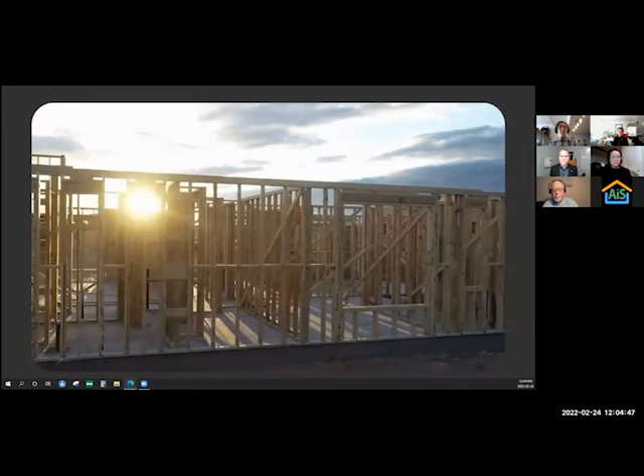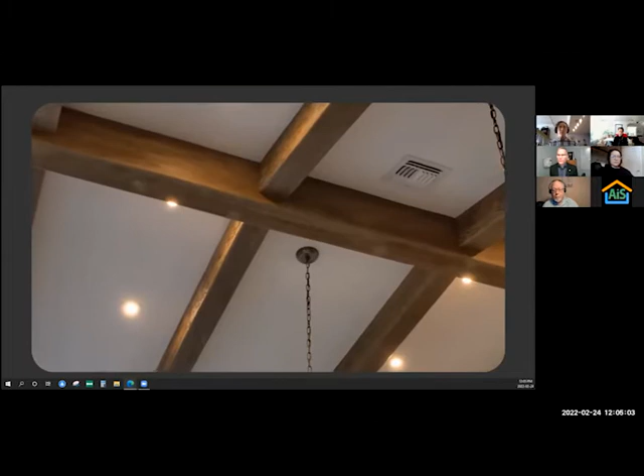Our mission is to make homes more affordable to build, more affordable to purchase, and more affordable to operate. To this end, we've made two-component smart switching the lowest cost method for providing electrical controls in new homes today. This simple innovation reduces material and labor hours to lower the cost of constructing new homes, and it makes all the switches in the home smart.

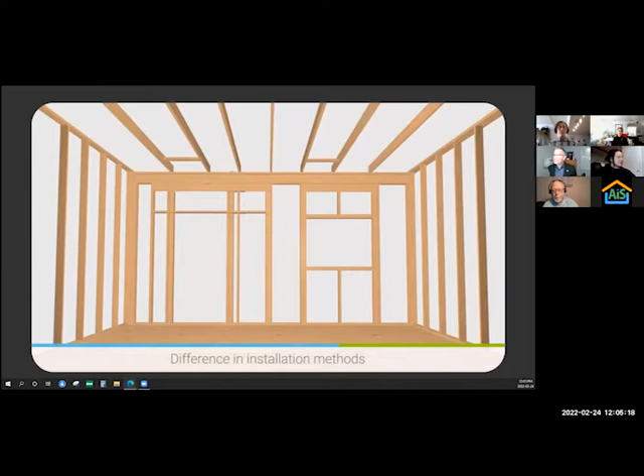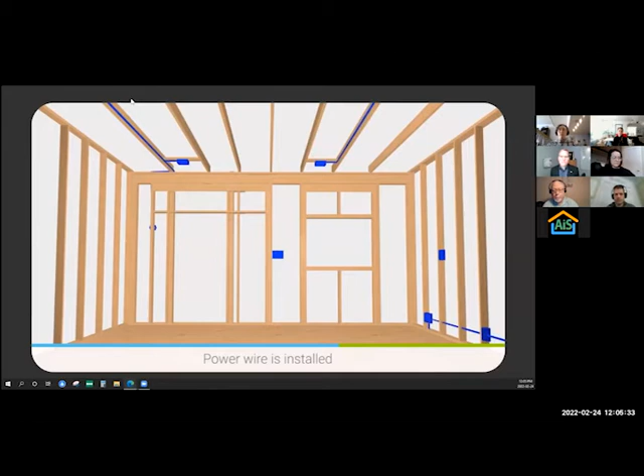Shown here is a home under construction ready for the electrical rough-in. To rough in the electrical system with wired switches, electrical boxes are nailed to the studs where space is available. Wire is installed to each box to provide power for plugs, lights, ceiling fans, and other electric devices, and wire is installed between each switch box and the electrical device it will operate. Levven separated the switch into its two operating components: the rocker portion that people use every day, and the power control relay that switches the power.

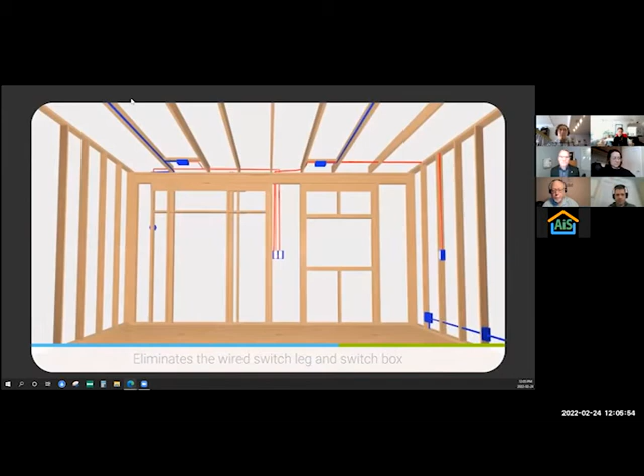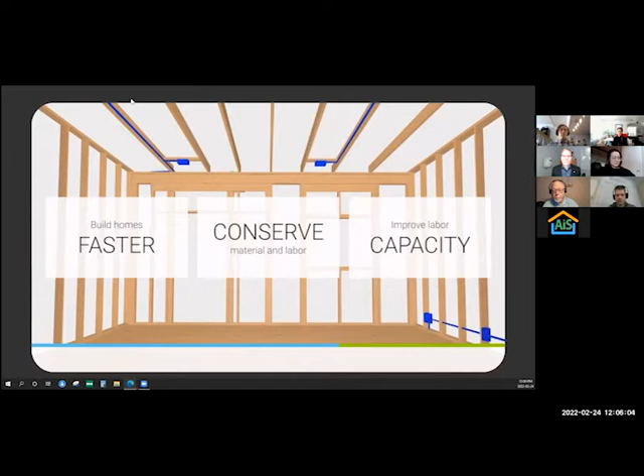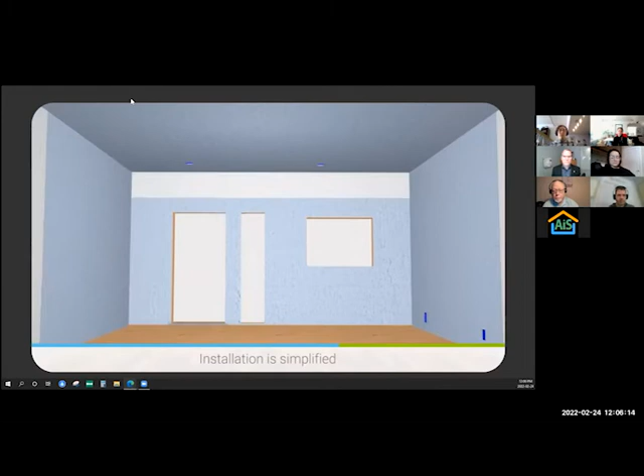This simple innovation shortens construction schedules by at least 1 day, saves 35% of the building wire and boxes, and eliminates tasks for builder personnel and 6 different trades to make homes more affordable to build and purchase. Levven power controllers are installed at the trim or final stage of construction. They install inside the electrical box, connecting the power wires with the wires from the light, plug, or electrical device.

Unlike switches of the past, Levven switches are free to be located where people need them. Levven switches mount directly on the surface after the walls are painted. Screwless trim plates snap onto the switch without tools, giving a compact, elegant designer's touch. Using the same wireless method that automotive key fobs use to lock and unlock car doors every day, switches send on, off, and dim commands wirelessly to power controllers.

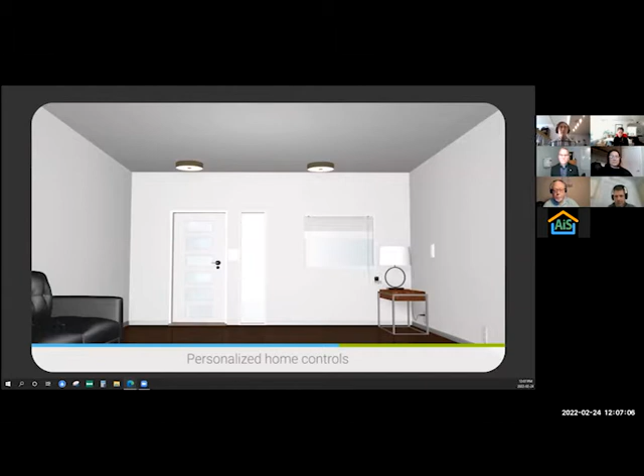Levven portable switches put controls at your fingertips in places like bedside tables, shop benches, or the visor of a car. Levven switches can operate power controllers from a distance of 250 feet. Switches and power controllers can operate together in any combination, giving limitless switching flexibility. Up to 10 switches can operate a power controller, and any combination or quantity of power controllers can be operated

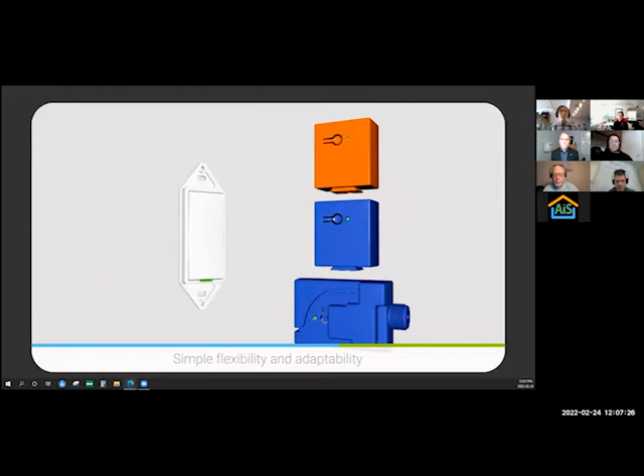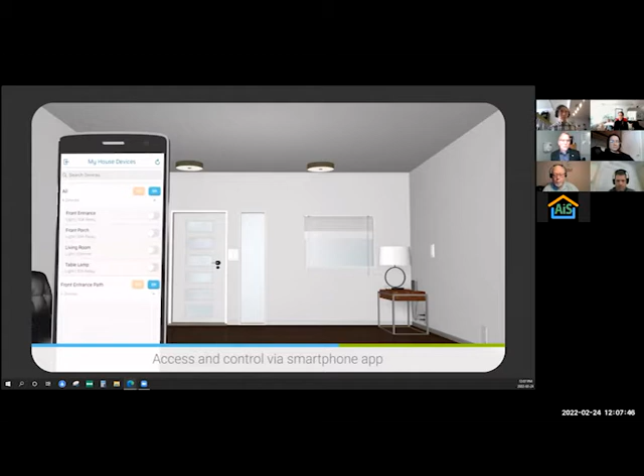by a switch. All the switches and switched electrical devices throughout the home can be controlled and configured from a mobile device or voice control with Amazon Alexa and Google Home. This increases the appraised value of the home while lowering costs. Levven Q and the Levven app connect mobile devices to operate and configure switches and power controllers throughout the home without programming, and this gives the homeowners the freedom to operate their home from anywhere in the world.

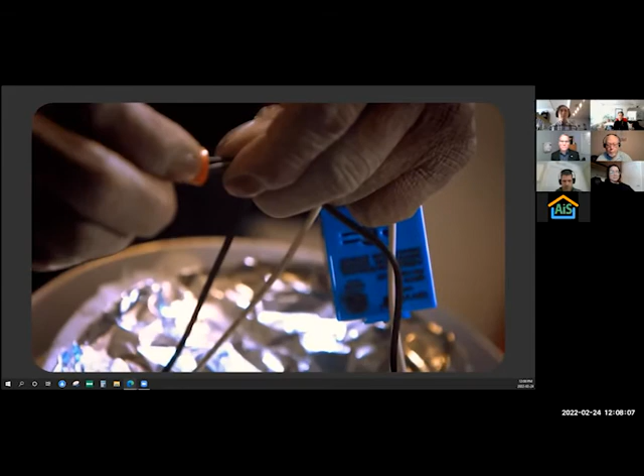Levven's business model is to match the electrical contractor's current price to the home builder. The electrical contractor does the electrical installation with Levven switches and controllers without increasing their price. Levven, making homes more affordable to build, purchase, and operate.

You're on mute, James.

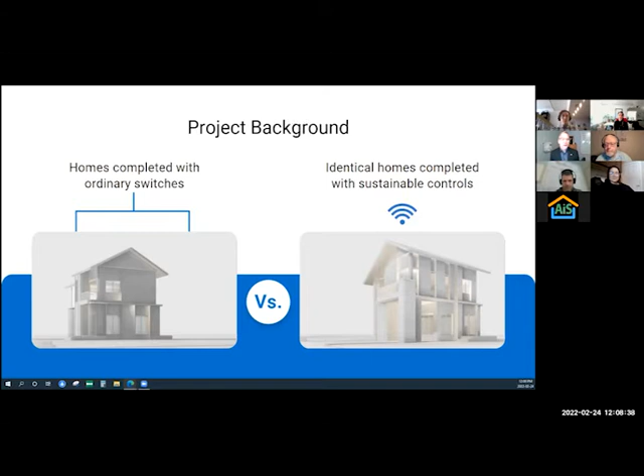Thank you. No worries. Currently, there is a lack of data to prove installation and operational savings across many green building technologies, and specifically for Levven controls. So we developed a sophisticated system to compare materials and labor savings of installing Levven wireless switches instead of conventionally wired switches. In pilots with Stepper Homes, they were able to reduce their trade labor time from 1.4 days to wire traditionally, conventionally installed switches, down to 1 day for installing Levven controls.

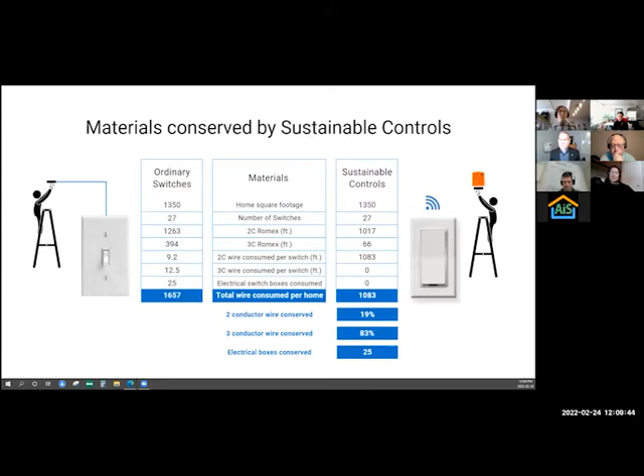They also reported a 35% savings in wire, eliminated 25 switch boxes, 170 plus staples, connectors, and nailing plates during construction. But since most homes don't have energy monitoring, we couldn't identify what operational savings would be available with whole home controls like Levven. And the other challenge was, this was data that we were collecting, and we really need third-party validated data. So this led us to partner with SAIT to launch the largest study of its kind, graciously funded by SIREA.

30 homes equipped with wireless switching and 30 homes equipped with conventional switches to quantify the amount of wire, materials, and labor needed for both a conventionally wired home and a Levven-equipped home. The project objectives were: quantify the amount of wire, materials, and labor needed for both a conventionally wired home and a sustainably wired home with Levven. Complete a comparative analysis to determine the embodied carbon impact of wireless lighting and power controls, and complete an operational energy comparison to determine the ongoing environmental impact of using wireless switches over conventionally wired homes.

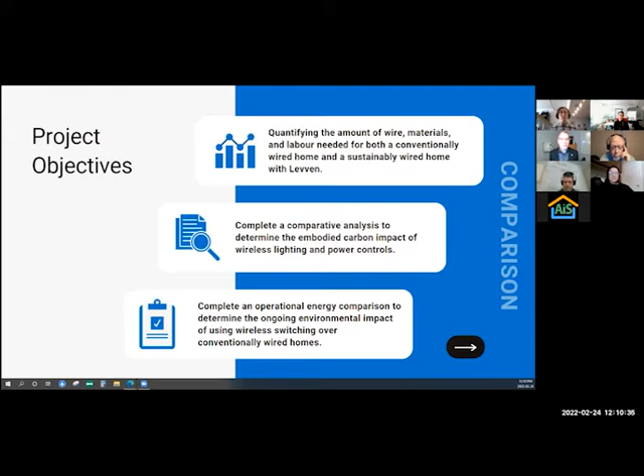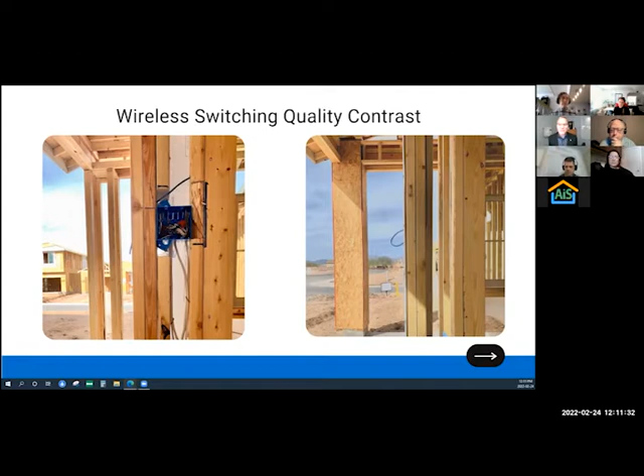The other benefit is one of the key outcomes a builder is looking for, which is improved build quality. I'll now turn it over to Tyler to talk about the project hypothesis, challenges, and progress to date. Thanks, James. I'm just going to do a quick introduction to GBT, Green Building Technologies.

So like Kat had said, my name is Tyler Wilson. I work at SAIT in the Applied Research Department for the Green Building Technologies Research Group. I work as the principal investigator for smart building management.

So I mostly work with companies developing new and innovative building products, mostly mechanical systems. So we'll work to either demonstrate or help them improve and prototype and commercialize their products by integrating them into our building, putting monitoring on them, and help to improve and give recommendations for their product.

So the Green Building Technologies Research Group works with industry partners and students to help develop new products, technologies, and processes. Our goal, shared with industry and students, is to enhance the commercialization of green technologies in Canada. So we're looking to fundamentally change the way that we build, educate, and develop skilled labor.

We have 5 research themes. The first one is net zero energy and energy positive design. And we have building integrated renewable energy, smart building management, architectural ecology, and materials and advanced component assemblies.

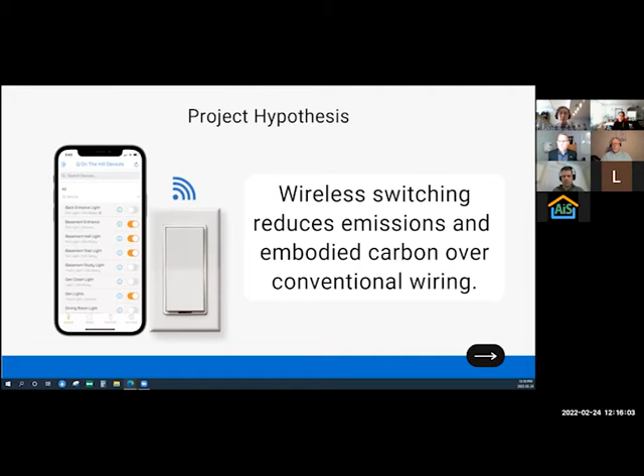We're also looking at embodied carbon emissions. Those are still being estimated, but the results from the LCA, the life cycle assessment, are going to be used in the analysis as part of this study with SSRIA. Next slide, please.

So the challenges and lessons learned. We partnered with 3 builders on this project, 3 production builders, and they have homes spread across Calgary and Edmonton. So we're looking at a comparison of 30 houses with the Levven switching and 30 houses with conventional switching. So I'm just going to speak to the bullets on this slide.

So one of the challenges we had was resistance to change. Electricians are all typically doing the same actions with relatively similar products in residential builds. Any variation is likely just kind of the sequence of actions that they do it in.

With wireless switching, it can be pretty frustrating for them to pick up a new way of wiring a home, and having to switch between doing conventional houses and wireless switched houses, sometimes more than once a day. So we found that there was a bit of resistance to change, a bit of frustration with the electricians, especially when they're busy and they have to go and do service calls, and they're just juggling the multiple installations.

And second was the training of the trades on the Levven product, or the wireless switching product. So Levven has a pretty awesome suite for learning the details of wireless switching as it pertains to managers, trades, homeowners, builders. They have tailored learning for each of those professions.

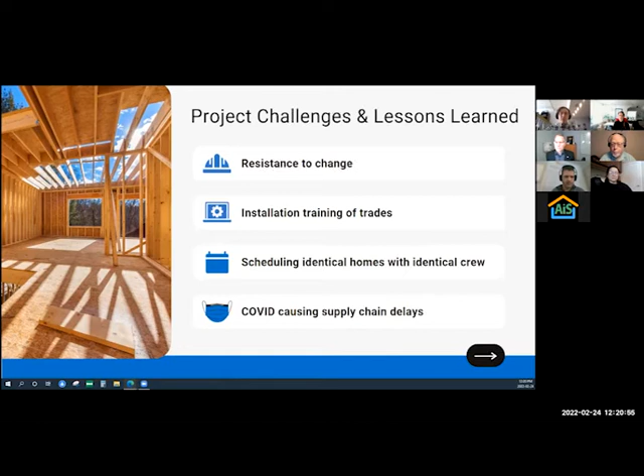So one more thing that's not on here is it was kind of uniquely difficult for this study because our team had to be there before the electricians arrived and leave after the electricians left. We have to be there every minute that they're there, so we could accurately capture the data that we need to do the study properly, to do the comparison properly. So having homes between Edmonton and Calgary and sometimes having spontaneous schedule changes made things pretty difficult. Next slide, yeah.

So progress to date can be broken down into these three areas. So the LCA comparison, the life cycle assessment comparison, that's the NSERC project that we're partnered on. The outcome of this study will be integrated into the reporting for the SSRIA study. So far, we've developed preliminary quantities of labor and material savings based on our project home comparisons.

We've vetted the toxicity of the ingredients of over 85 individual parts; this is things like wiring, circuit board components, and everything that goes into the manufacturing of these products. We've investigated end-of-life options for Levven and conventional components and developed preliminary recommendations for sustainable product design considerations that Levven can pursue to improve their outcomes.

2, the installation material savings. So we've completed 34 homes. So we've collected material and labor data on 34 homes, and we're currently adding and tabulating that data. And we have 31 homes with monitoring systems installed. So we're just over halfway complete to the 60 homes.

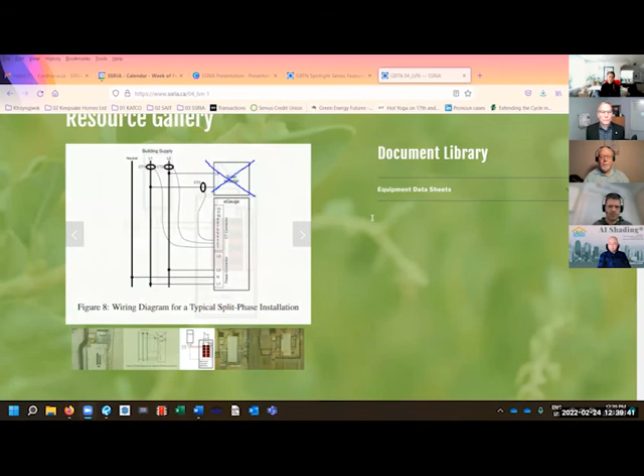There's a few more questions that have been asked that can be further investigated there. And this is where we'll be sharing the project innovation. You've seen some of the video and images today, and as the milestones are completed on this project through design and monitoring, we'll be posting different information in the document library. So you can find out what the challenges and successes are as the project goes on. If you're here today, it means you have an invested interest in this particular project, so that's one way to keep in touch on what's going on.